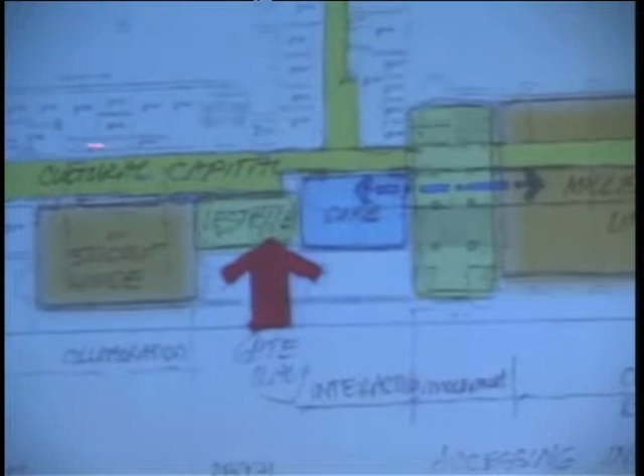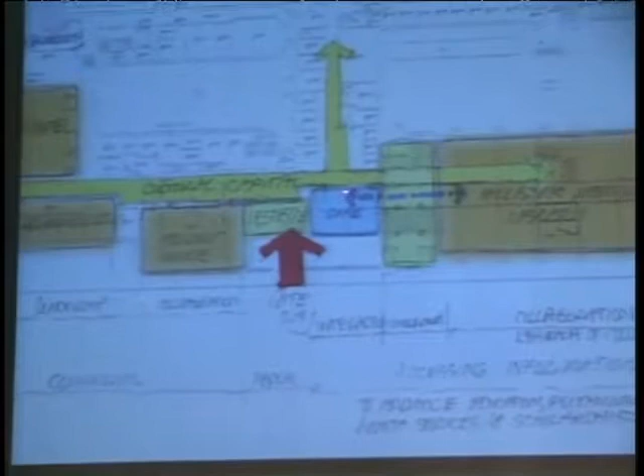This was an early sketch we did. Here's the library, here's the main entrance of the campus, and talking to them about how they could create a campus street that would connect the chapel and administration, a student lounge, and a cafe into the library. So they had, you know, McKinley Street through the center of their academic complex.

The library was a vertical library, which is not these days the ideal way to plan a library. You can see here it's 7 floors. So we struggled a lot with the zoning of it, of how to make this library work when you had rare special collections in shelving systems down in their very leaky basement, and then a main service floor. We actually finally zoned it as 3 main service floors. The top 2 floors are going to be phase 2, which will be a kind of incubation lab, a research and development space for the library to develop software and publications.

Now, the first impression of this place was not great. I'll show you in the next slide. There was a huge vaulted lobby with what we came to know as the stair to nowhere. The entire thing is beige, as you can see. There it is, the photos stitched together, these beautiful vaulted spaces with these plaster columns, hanging fluorescent lights, bare bulbs. This guy with the white hair is the cost estimator who kept shaking his head saying this is going to cost a lot. And this was the first impression of the library. Nothing about books, nothing about a service point. Not even sure when you got there whether you were in the library or not.

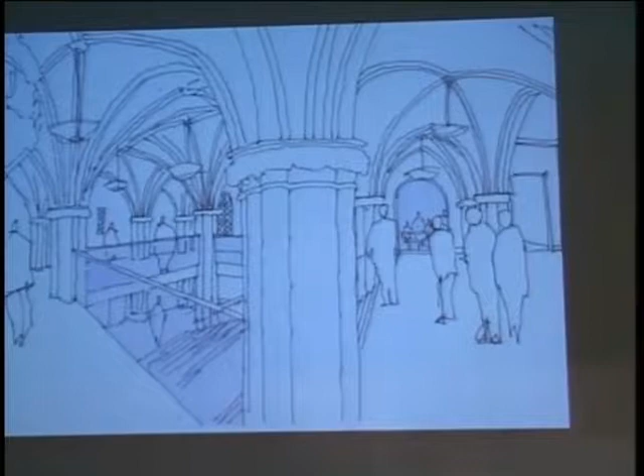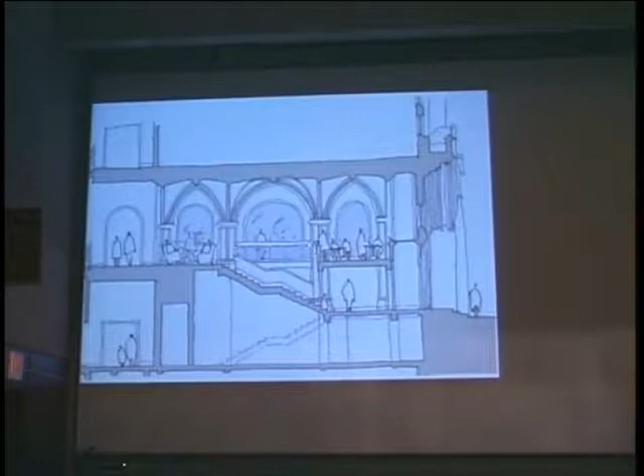We looked at a number of ways to use that. We looked at building a mezzanine within the space, you can see there in section, which turned out to be not cost effective. We also looked at punching some holes for windows in the existing walls between the arches so that when you walked into that space, you could really see the library beyond.

So the 21st century library, okay, we've got the building fixed up, we've got a nice entrance. What's going to make the library tick? We use a phrase in library design where we say, let's throw everything out on the lawn and then pick what we want to keep and decide what we need.

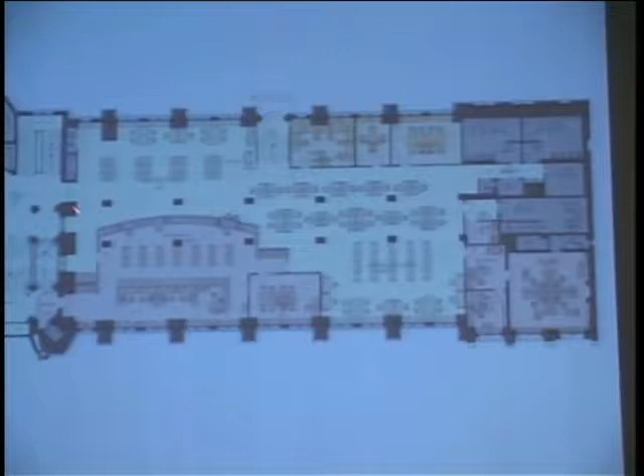Another challenge on this project is that the library, in addition to being vertical, has very long and narrow floor plates—great for getting light across it, but low capacity in terms of ability to hold either collection or seating on each floor. This is the main service floor, with the service desk here. This is the lobby with the stair to nowhere, as well as a central stair that became the main circulation spine vertically through the building. Here's the cafe and the connection back into the adjacent building, which is how you enter the campus.

Here's a picture of that main floor, now transformed. Gone are the little TVs and the card catalogs, and instead it's full of technology. So that was the first floor—come into the library, get the tools students really need: the technology, access to electronic information resources, and the service points and staff who can help people with their research on the first floor.

Then there's the third floor, and they had two needs they really wanted. One was a traditional reading room. Every project in New York is influenced by the New York Public Library, which has this absolutely fabulous reading room renovated about 5 or 6 years ago by Davis Brody. It has a ceiling with angels painted in murals, lots of gilt—it's beautiful, a beautiful restoration job. So with every library we do, we hear, could you make it like the New York Public Library? Well, if you have the budget, yes.

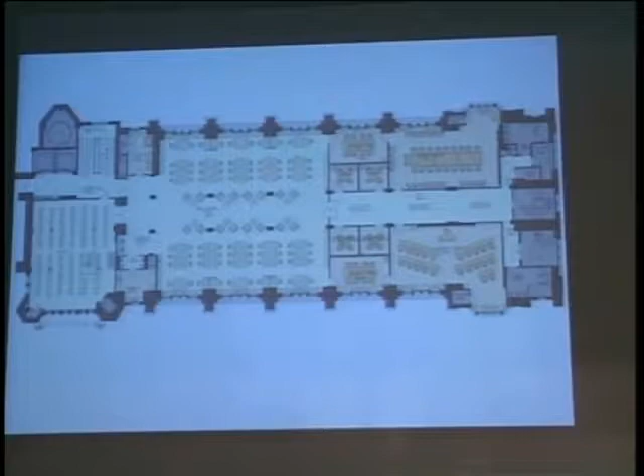They didn't have that budget, but we did work to give them that traditional space while making it more multifunctional, because they weren't a wealthy institution that could dedicate spaces to just one use. We put a series of classrooms adjacent to it, with small breakout spaces attached for group work. Even the main reading room is multifunctional, with audiovisual systems, power and data connections, so it can be used for presentations, book signings, fundraising events, you name it. So here's some pictures.

Okay, so now they're ready to start phase 2. I think this is where they really unlock the floodgates and look at these upper floors and how they can leverage the space and funding they have to develop spaces that promote learning and a creative environment. We've had lots of discussions about what kinds of spaces are good for project work, which isn't anything new to you - look at your design studios, working in a big open space, wonderful for sharing ideas. But academics and librarians are used to enclosed offices and hierarchy, so these are new ideas to them.

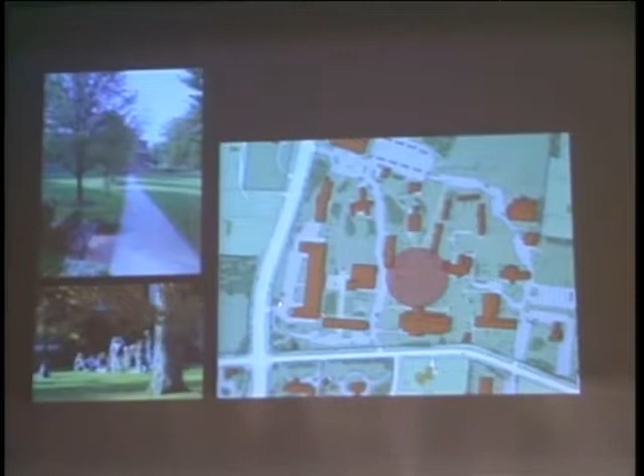So here's the existing campus - a number of small-scale buildings. These are kind of 1950s box brick buildings, but there are also old houses that were part of an estate purchased by the institution and used as classroom buildings. There's a wonderful green space here, and it's pretty close to the center of Philadelphia. The students who go there, many from the city, really value the landscape and suburban park-like environment of their campus.

So we started with programming - student focus groups to find out what they wanted in the building and the character of the building. And that was mentioned repeatedly: please don't ruin our park that's in the middle of our campus.

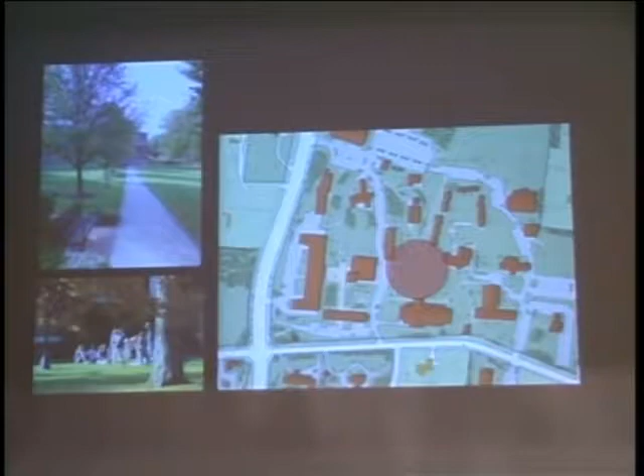This is the site, and this is the runoff issue. Let me go back—the whole campus slopes downhill, and you can see a bit of a drainage swale here that is right in the middle of the site.

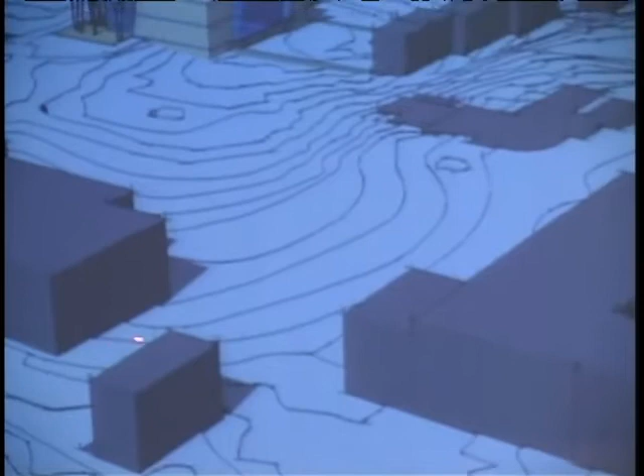We also used SketchUp, although not so much with the client because it's a little intimidating—it looks like a barren wasteland—but for us it was helpful to start looking at the massing of these buildings. Are you using that at all here, SketchUp?

Yeah, yeah. This was an early scheme. This is a representation of the White House, the early building I showed you, and then the new campus center going in there.

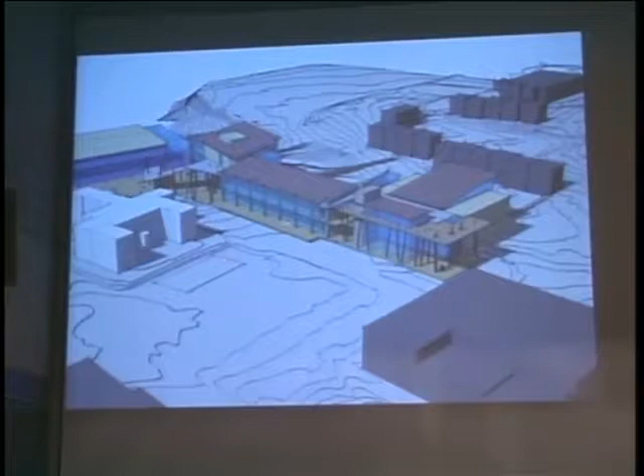So we finally tried to develop a design solution where the building was really nestled into a hillside so that the scale difference of these spaces didn't overwhelm the existing structures.

In order to help with the runoff issue, we tried to minimize the surface area by putting parking for the campus center below the new recreation center that was being built, again looking at the hillside and how you could work with that.

We really worked with Carol Johnson Associates as landscape architects to develop the need for stormwater detention on site as a site feature for the building.

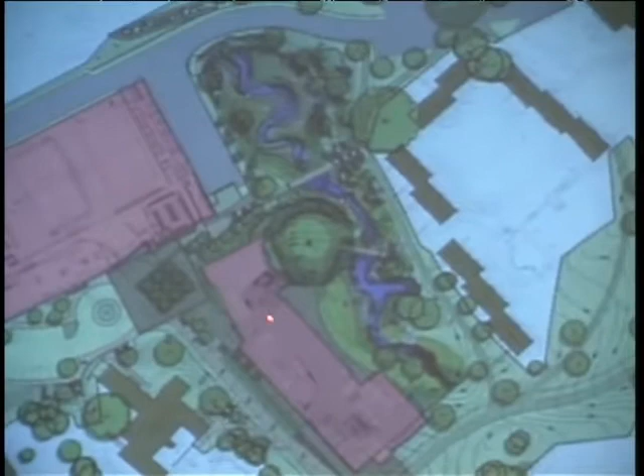So here you see the campus center, this is the White House, this is the new athletic center, which was built by another firm simultaneously designed to this building. So the expectation was that we would work together in order to do the site development around that.

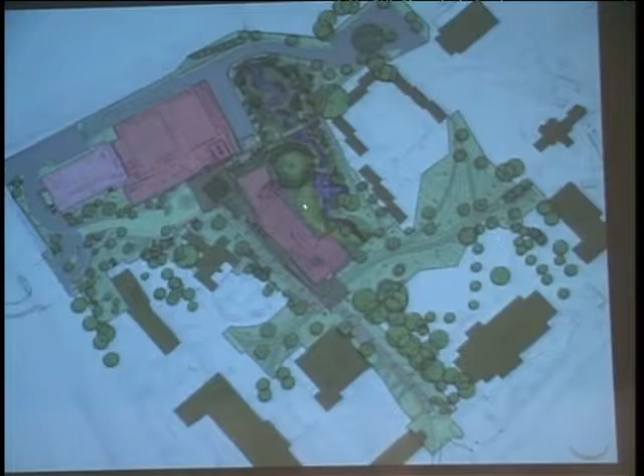Our firm held the contract for the site development. Below this is a 200-car parking garage that brings service into the lowest level of the campus center, and here's the site stormwater management system.

You can see here, this side of the building is a dining hall with a terrace that overlooks this ravine, a natural ravine that has been excavated out more deeply to expose some rock ledges, plantings around it, bridges across it. The idea is to let the stormwater fill it up and hold it there so it can be released more gradually into the hillside, developing it as a feature within the site rather than a detention pond off on the edge that you screen because you don't want people to see it, but you have to have it.

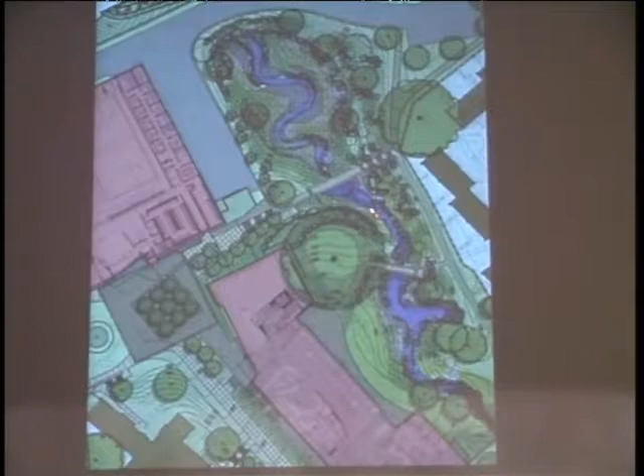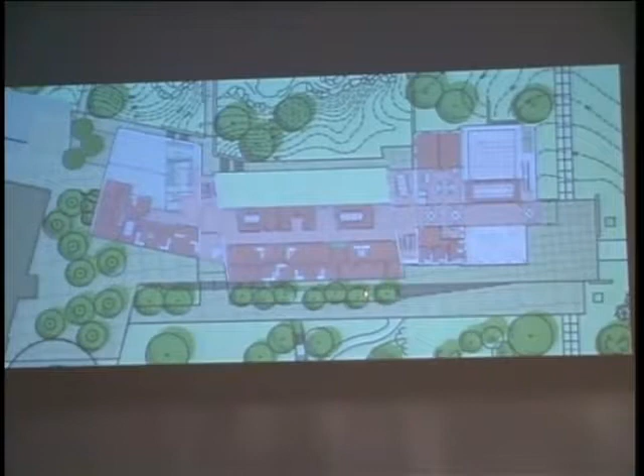The original plan was that these would stay in the student center, the stucco building I showed you earlier on. But when we did the cost analyses for this, it was actually more cost effective to move them into the new building than to try and renovate that building. They'd budgeted just enough in the existing building for some paint and wallpaper and a few life safety code upgrades. When we really got into it, it needed so much structural work that they just couldn't do it within the project budget.

So those were added in kind of a crow's nest together with student organization offices, meeting rooms, and so on for student government that overlook the performance space in the main lobby of the building.

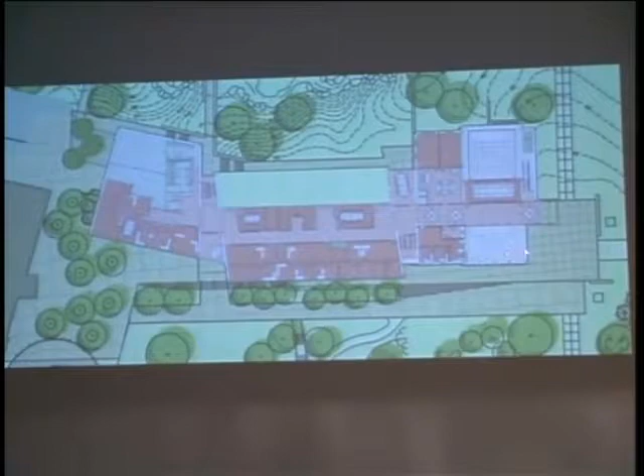So again, in terms of design language, what did we do to bridge the gap between the business majors and the architecture students? Well, we did get them to accept a relatively contemporary design language. We worked a lot on incorporating sustainable design features into the project, the primary one being the site stormwater management systems. And we worked to reduce the scale of the building so that it was more compatible with the small houses and estate houses that were on the campus.

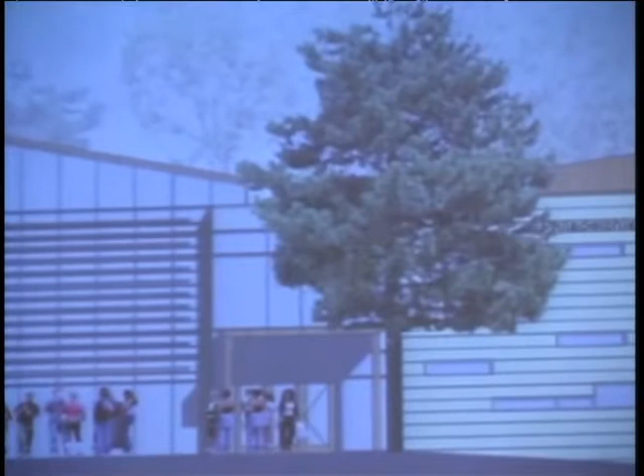So here it is, it's under construction now. This is one of the short elevations of it. It's precast concrete and curtain wall system with an aluminum sunscreen system, copper roofs, and a large display area. They have a huge fashion design school, and this was an advertisement for one of their end-of-the-year fashion shows.

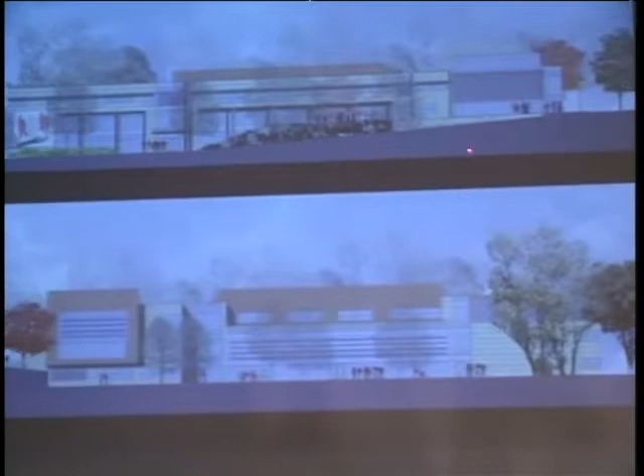And the top elevation is the side that faces the White House, the administration building. You can see here how it steps down. So you enter at this level, or you enter a story below. This is a bookstore, this is a terraced area with tables, coffee shop, things like that. And then this is the performance space in the lobby at the upper end.

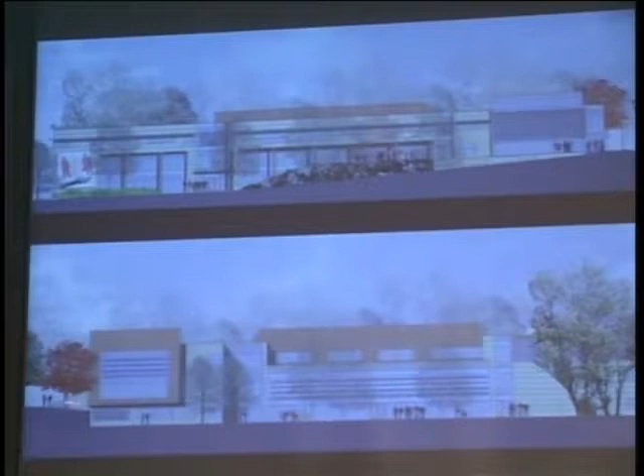This is the side looking at it from the ravine, as the stormwater management feature came to be called. You can see very glassy elevations with the aluminum screens on it, and some terrace areas that overlook the site.

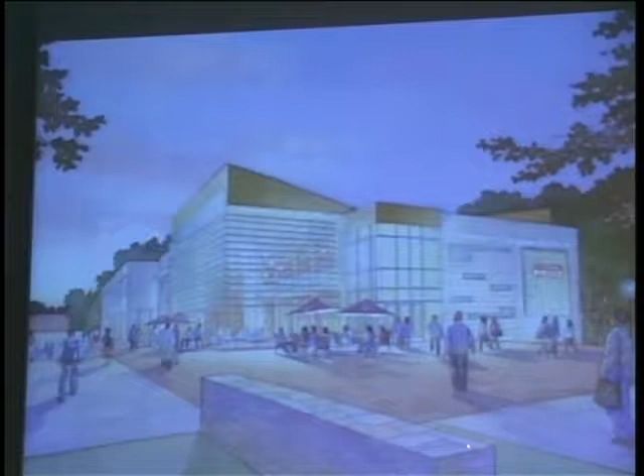And this was the artist rendering that was done for the dedication, A Beacon at Night. That was the thing the president of the institution wanted the most, was to have a place on campus that was bright. Incidentally, it's kitty-corner to the architecture and landscape architecture buildings, so for those late nighters, there's a place to go get coffee, which was just huge for them. They didn't have that at all.

And that's it, that's the projects. How'd I do? Not bad, the 'how did I do' was about time. Okay, not bad? Okay, did you turn it off?

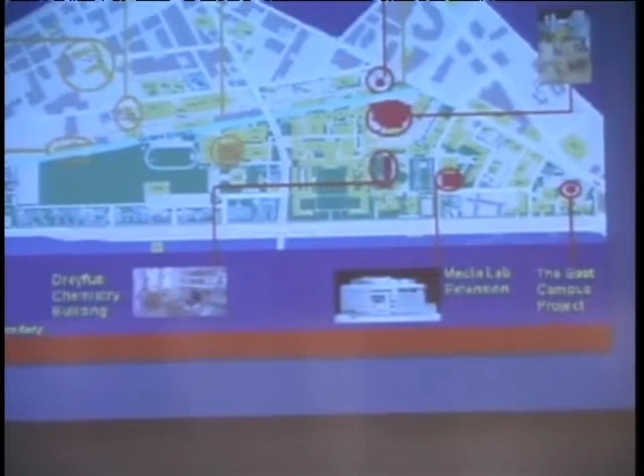MIT, over the past 10 years, has been going through a major series of upgrades and new buildings to their campus. This is the core of the campus. For those of you who are familiar with it, the big dome is right here. This is Massachusetts Avenue going through the middle of campus. The Charles River is out here. Kendall Square down in here.

One of the joys of this particular project was that we got to work with 3 major architects who are all doing buildings along Vassar Street. This is the Stata Center by Frank Gehry here. Right across the way is a building by Charles Correa called the Brain and Cognitive Sciences Center. And then Steven Holl from New York City was doing a dorm building down at this end of Vassar Street. So we had an occasional clash of ideologies between architects as we tried to resolve issues with all 3 of them, which was fun.

Vassar Street, which is the blue line right down the center here, is about a mile long. It used to be the back door of campus. All of the focus was towards the river, but as the campus has grown fairly steadily back towards Cambridge Center, up into this area, Vassar Street has changed its role in the campus, and it's become sort of the front door. It's the place where the new student arriving on campus drives down and gets introduced to what MIT is all about.

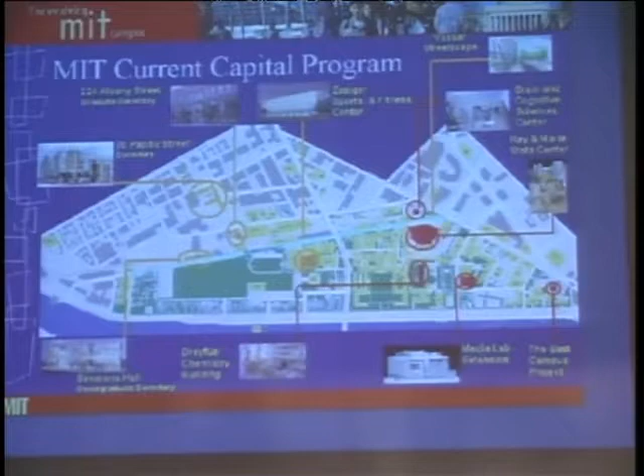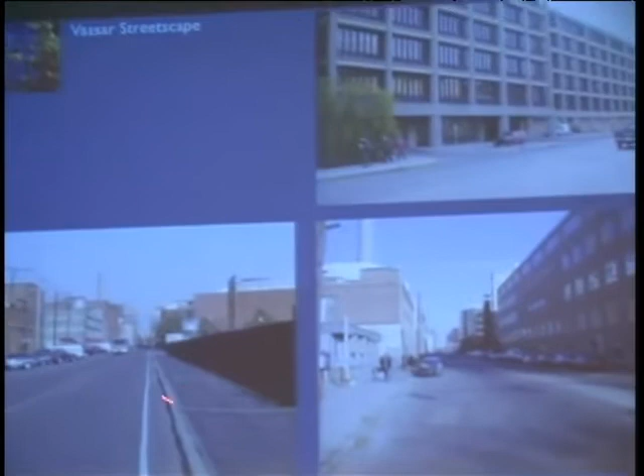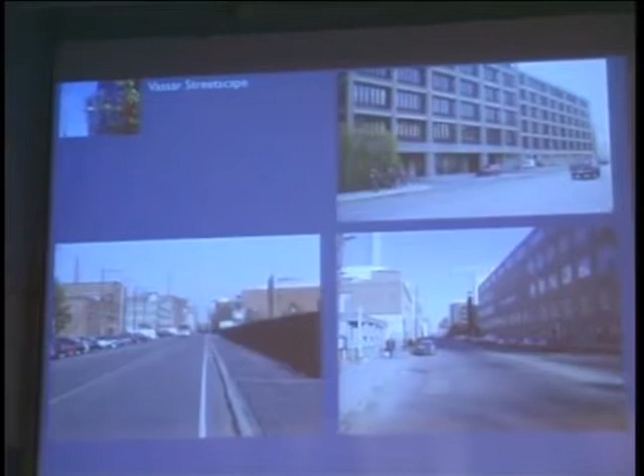It wasn't much of an introduction for a very long time. These are the pictures of what was there before: a 6-foot bituminous concrete sidewalk, about 40 to 45 feet of roadway paving, and a similar sidewalk on the other side. It got a little bit better—we got a few trees over here when you got into the main portion of the campus—but still not much of an image if you're bringing your child and they're getting ready to pay $40,000 a year or whatever the admission is. You don't want them driving down that.

So they decided it was time for a major image overhaul. And Carol R. Johnson Associates was fortunate enough to be selected to do the work.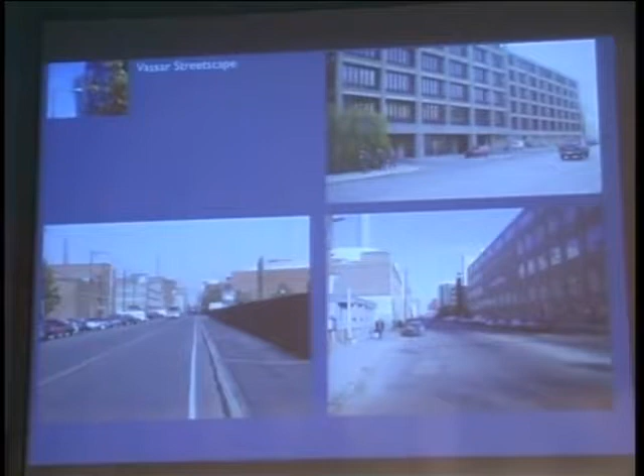Now, they wanted to accomplish a lot with this redesign. The first thing that they wanted to do was to get rid of as much traffic paving as possible. They had 45 or 46 feet, something like that, between the curbs, and they wanted to cut that down to the smallest space possible. They wanted to make nice big sidewalks because obviously they got a lot of student traffic moving up and down this, and there was completely inadequate space for that. They wanted the standard street trees, street lights, and all that other good stuff that you get with a streetscape improvement.

They also wanted to look at a different way to handle bicycle traffic on the campus. The traditional way of accommodating bicycles is you stripe off a lane right next to the curb between the curbs, and that's where the bicycles move. They wanted to bring in a system that's called a cycle track system that put the bicycles outside the curbs, up with the pedestrians. This is something that's very commonly done in Europe, but from what we could research and find out about, it had never been done in the United States before. And it took a lot of convincing to the planning department and the traffic department at the city of Cambridge that this kind of a system would work.

Half of the project has now been built. It's been in service for maybe 2 years, and I saw the bicycle and pedestrian coordinator from the city of Cambridge the other day, and she didn't try and strangle me about this, so I assume that it's working well. But we'll find out, I guess, as the years go by.

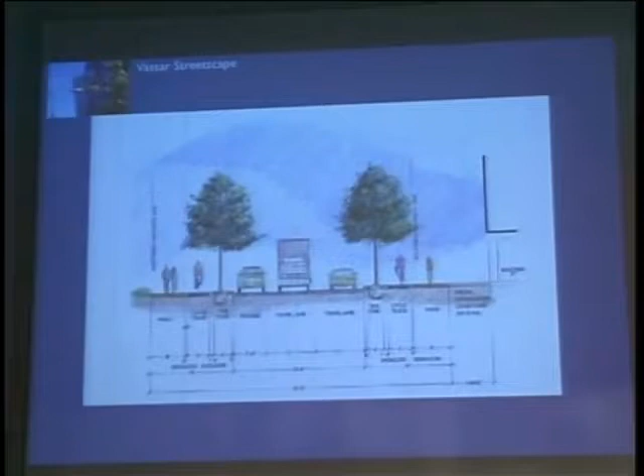One of the issues was this: the street is a mile long, and it basically has one road down the middle that breaks it into two pieces. So it has these very long, out-of-pedestrian-scale sections, with no regular block rhythm to break it up.

One of the things we identified early in the program was trying to come up with a device to break the length of the street into a series of what looked like more or less normal pedestrian blocks. One of the devices we came up with was a series of mid-block crossings, and we jumped on these as opportunities to do a lot of different things.

They also became traffic calming installations, because over that long a distance vehicle speeds naturally creep up the longer the cars have to run. So we introduced speed tables to slow them down, put in special paving for pedestrians, and did a lot of work with lighting to focus attention on the locations for safety, and to create a sculptural effect with the light fixtures we chose. It became the defining theme of much of the roadway.

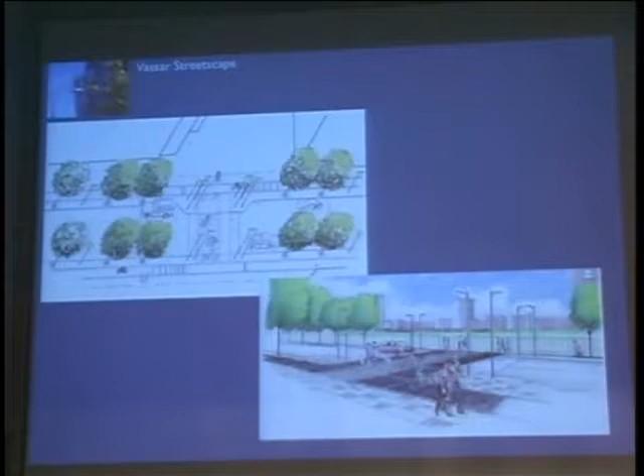Now, the problem with doing large streetscape projects is when you try to show them on PowerPoints, it really doesn't work, because you get these great big long things that nobody can actually read.

But this is the eastern part, the part that's been built. This is the Stata Center down here, and this is Charles Correa's building up there. You can start to see the rhythm of the tree plantings we were trying to do, responding to the openings and access points to the buildings along each side. You can also see how we tried some bending and twisting with the roadway to introduce chicanes as another traffic calming feature.

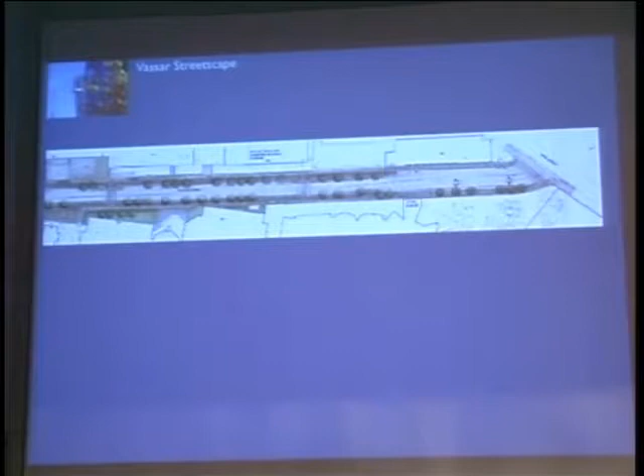Here's one of our mid-block crossings, and here's another one down here. There's probably another 250 feet to the end of the roadway before we hit Mass Ave and this eastern part comes to a close. Just looking at a couple more details, here's another contract-document-level design of that crosswalk.

As we were working with the cycle track, the way it's supposed to operate is: on this side you're moving with traffic eastbound, and on that side westbound. So you have to cross over—if you come out of a building here, you have to cross over and use the cycle track in the other direction. That introduced all sorts of complications about how we move bicycles back and forth across the street, which got to be a lot of fun.

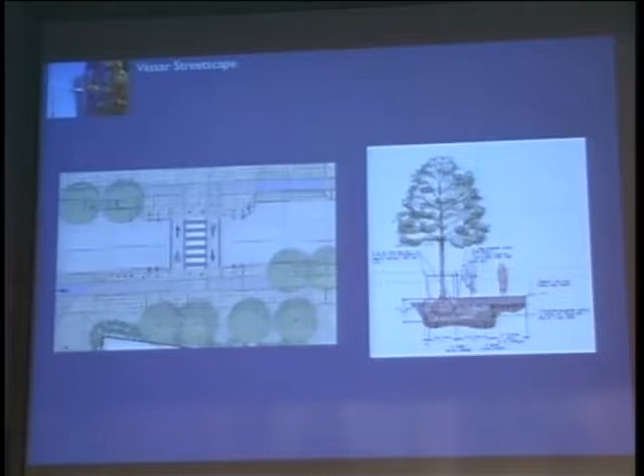This is a detail of the planting, and one of the things we talked about earlier was treeways. We used a treeway system for planting all the street trees along here, to introduce something that would be a long-term proposition for maintaining the health and vitality of the trees. We had some interesting questions about that earlier.

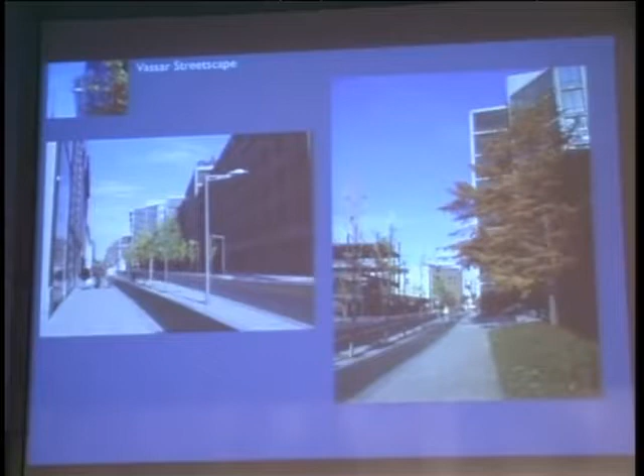These are some finished pictures of the project. Here's a cycle track on one portion, still with a decently wide sidewalk for pedestrians. Same thing here—we have a bicyclist who's being nice and staying within the cycle track, so we know that works.

One of the things we were going for was this sort of high-tech look with everything we tried to do here, thus the choice of the particular light fixture and some of the other fixtures on the project.

One of the cool little things we found were these lane markers, roadway lane markers. They're about 4-inch diameter, like a hockey puck. Inside that, they've got a little LED light and a little solar collector, so they're solar powered. You basically just core a hole in the pavement and pop this thing in, and then forget about it. It's just there until the LED burns out, which is years. So we used a series of those running down the edges of the cycle track to define and highlight it at certain places where we knew there would be conflict points coming up.

It was a very fun, very interesting project to work with. I'm really going to be interested in seeing how the second half comes out, because that's a much bigger piece of the project.

This particular light fixture is the Sirius fixture made by Hess America. It was the first major installation of that fixture in the United States for the company, so Vassar Street is now on the cover of their catalog. And I just saw the pavers we used also ended up on the cover of Hanover Pavers' most recent brochure. So we got two covers, even if they're not magazine covers, at least we got some covers out of the project, so that's great.

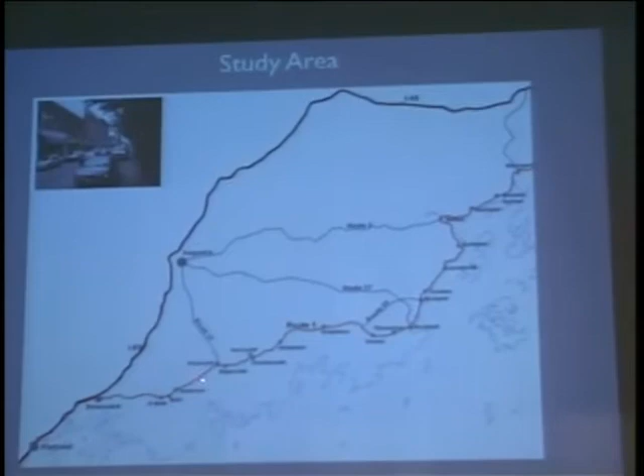We've been doing a lot of typical planning. This is the first planning study of this type and scale that I've been involved with, so this has been a real learning experience for me.

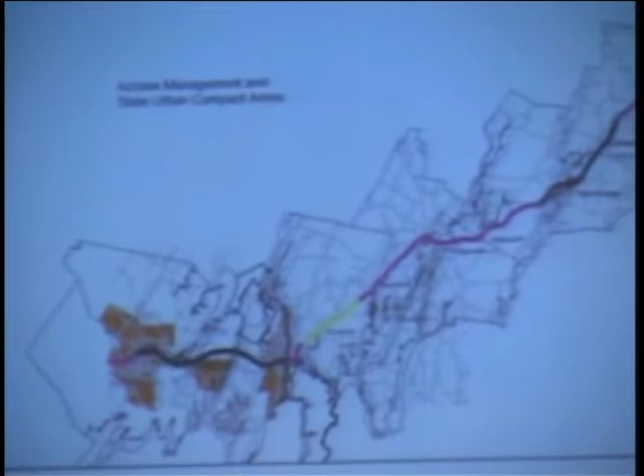I'm starting to look at some of the issues about access management, urban compact areas, which are state agreement areas between states and communities about maintenance and municipal services and so forth, and starting to look at some of the characteristics of travel that occur along that corridor.

How far people travel to go to work, what times of day they travel, where they start and where they end, and so on and so forth.

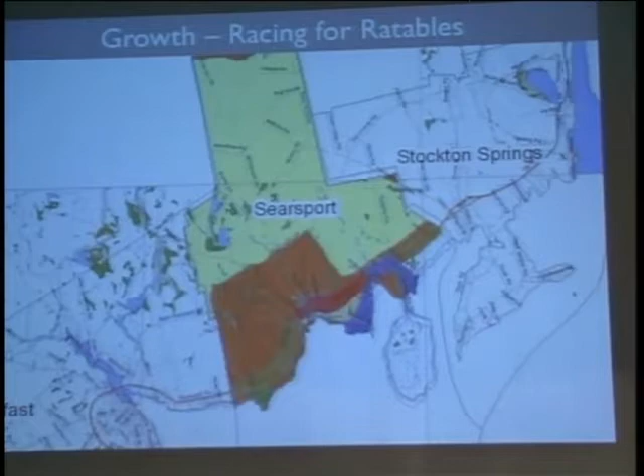So the emphasis is clearly on getting people as close to that Route 1 corridor as possible. That's where they want to be, that's where the access is, that's where the land prices are higher, that's where access to potential customers is greatest, and so forth. So that puts even more stress on that Route 1 corridor.

We spent about a week this past summer out driving the corridor, walking our way through each town, trying to identify what the major issues were, both in terms of transportation issues, land use issues, scenic value, recreational value, and so on. We did a whole series of diagrams talking about each town and what we saw were its opportunities and problems it had to deal with.

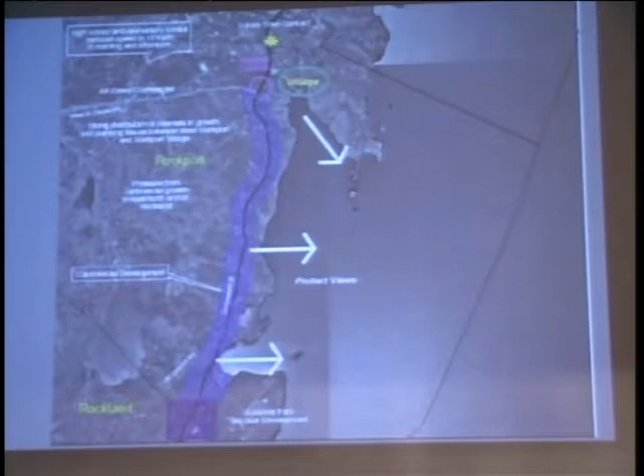We took those diagrams back out to the communities and said, okay, here's what we think about your town. Do you agree with us? Are there problems we're missing? Are there other things we need to know about? Did we get it right? We asked people to prioritize their key issues, the things they felt needed the most focus and needed to be solved most urgently as we pressed forward with the study. That will form the basis of more analysis in the next phase of the project.

Then there's a policy group, which is really the state agencies. The state agencies are not making the decisions in this process — the citizens are making the decisions. The state agency's charge is to figure out how to implement those decisions and what they need to do within their organizations and structures to make those decisions implementable.

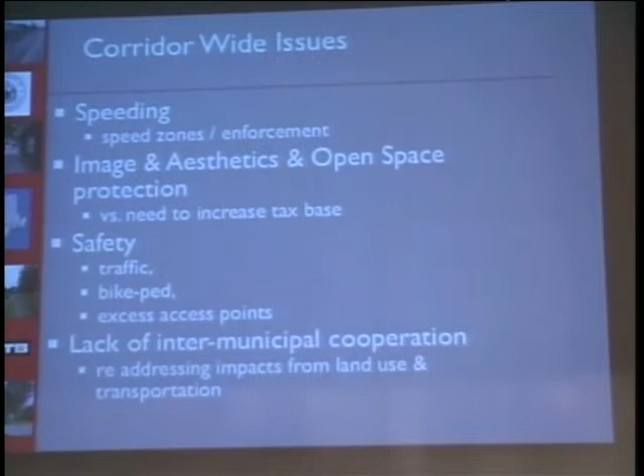Some of the issues we've identified: obviously speeding is a big issue. Interesting that the number 2 issue out of everything identified consistently across all the communities was image and aesthetics, because they understand that this corridor — a vital part of their town's future — is in tourism, and if you start mucking up the image, you're going to lose that tourism opportunity and the potential for development and investment in the land.

Safety, and communities working together, has been an issue in the past. Hopefully we'll be addressing that through the framework we've established. Truck noise and so forth — we can skip through those.